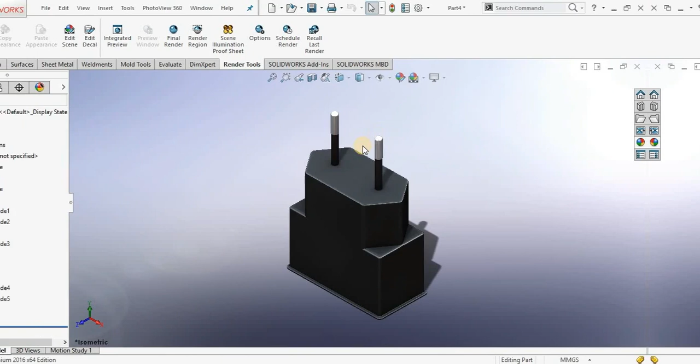Today I'll be showing you how to draw a charger on SolidWorks. The first thing we're gonna do is to open a new part.

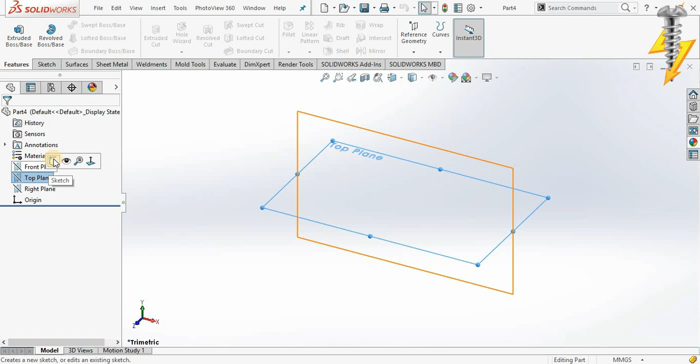We go to the top plane and open a sketch. Draw a rectangle from the center, then we go to smart dimensions.

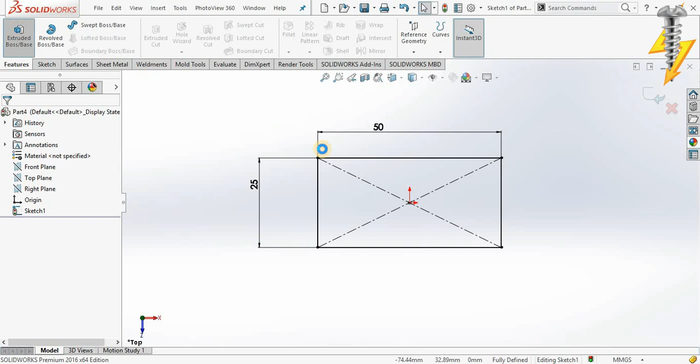We go to features, extruded boss, then we choose 29. Then we open a sketch on this face and set it to normal to.

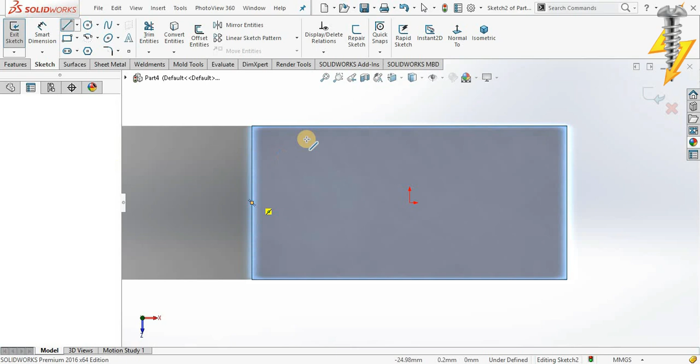Go to smart dimensions and take suitable dimensions, 9mm for each side, that's enough.

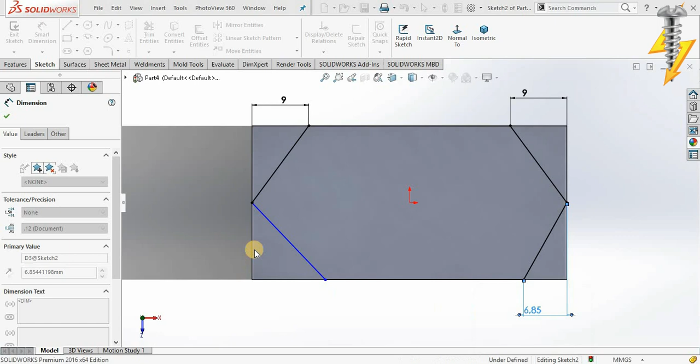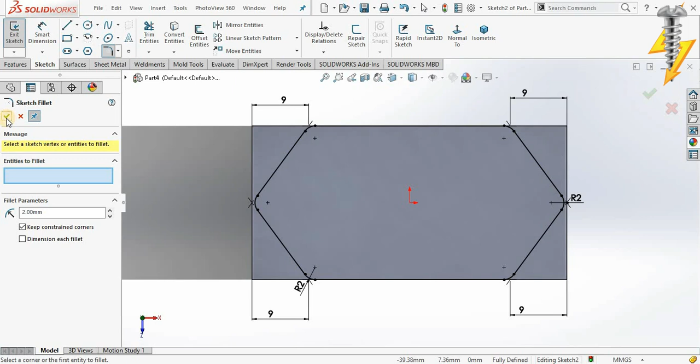Then we go to sketch fillet. We select those 2 points and take 2mm, from here to the other sides. We press OK, then go to features, extruded boss.

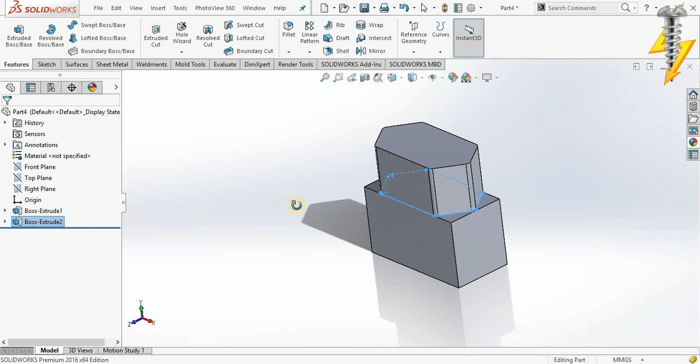Then we can add more fillets to make it look more real. Two is too much, 1mm I guess.

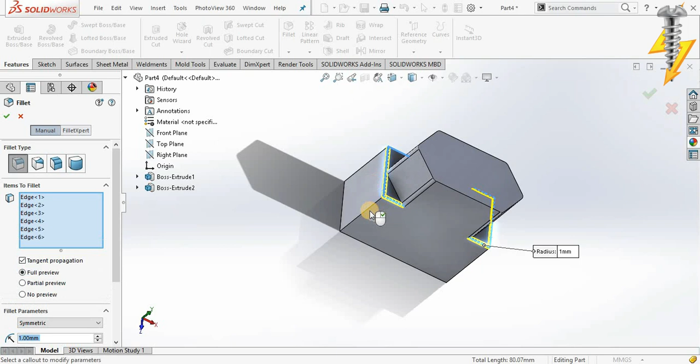Now it looks more real. We can add something to this stand. We open a sketch like you see, then we press offset entities.

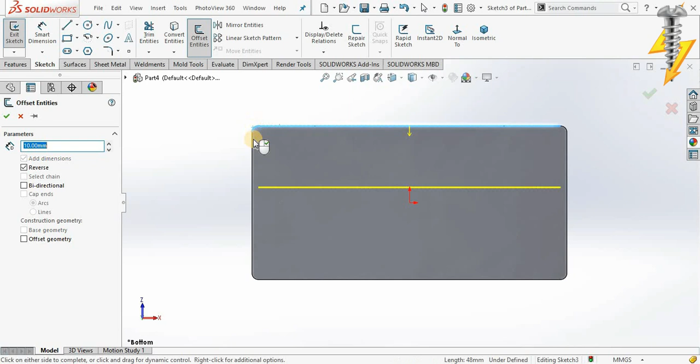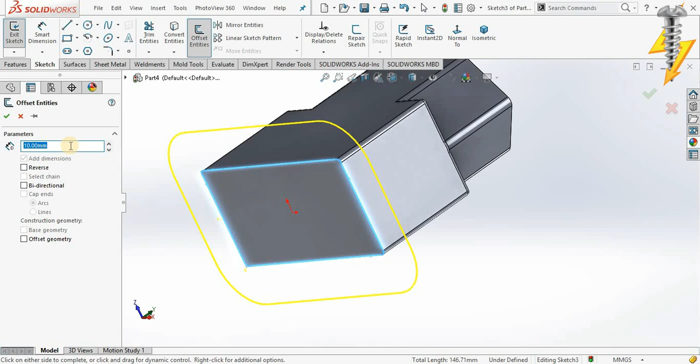We select all entities and set reverse. We select the wrong one here. We press 1mm, that's enough, and extrude boss by 1mm.

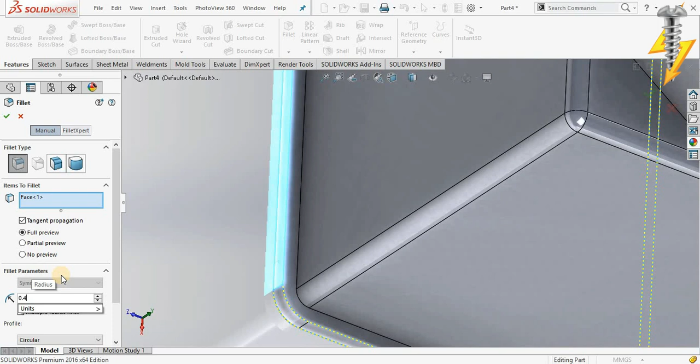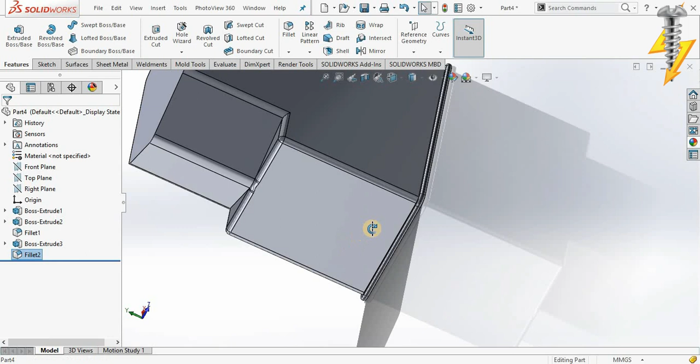Select the whole part, go to fillet. The reason why we keep adding those fillets is because it gives a real view for the product, because in real life those edges don't really exist.

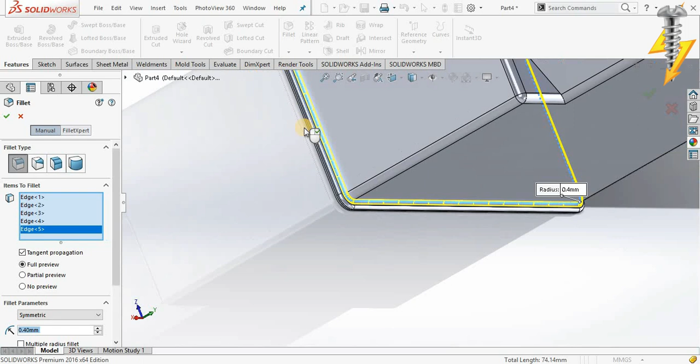We're okay with that now. We press OK, we are done here.

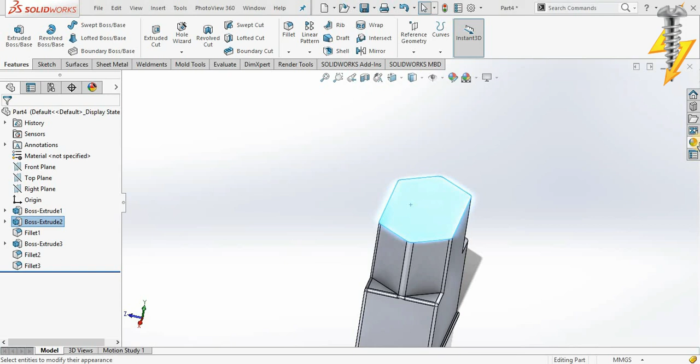Now we can change the color of the product after we complete. Before we complete, I'm sorry. I guess it's black. We press OK now.

Then we choose this sketch, add a fillet on this plane. We are okay with that.

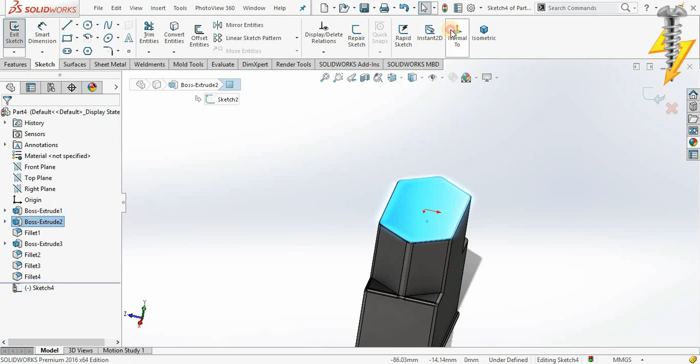Then we add a sketch here, normal to. We draw 2 circles on both sides.

3mm circle will be enough, 12mm for both.

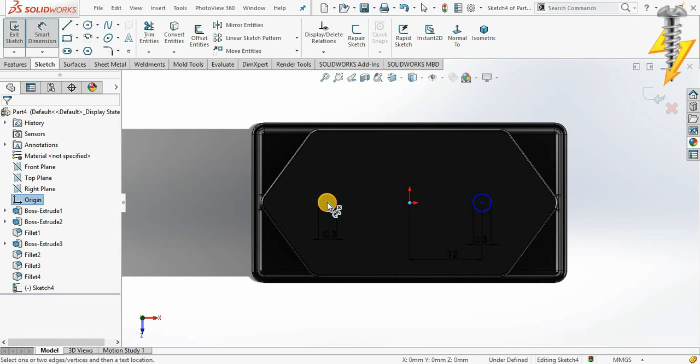And we press OK. We go to features, extruded boss base, and we press OK.

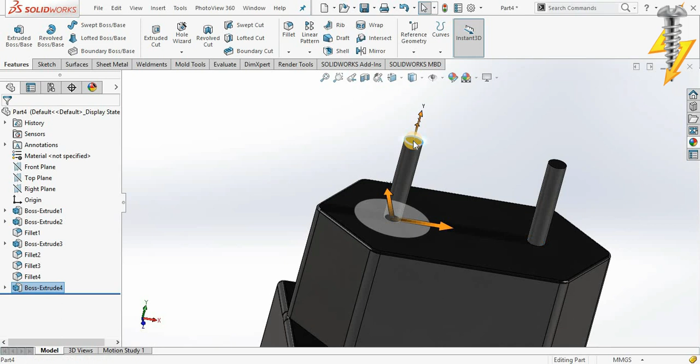Then we almost complete, and for the aluminum parts we open up a new sketch and set offset entities for 0.1, and press OK. We do the same thing for this and press OK.

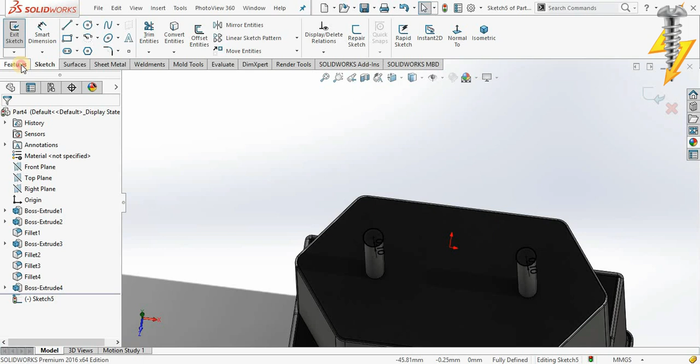We go to features, extruded boss, we choose 10. 10 is okay.

We open fillet, choose 1mm, and press OK.

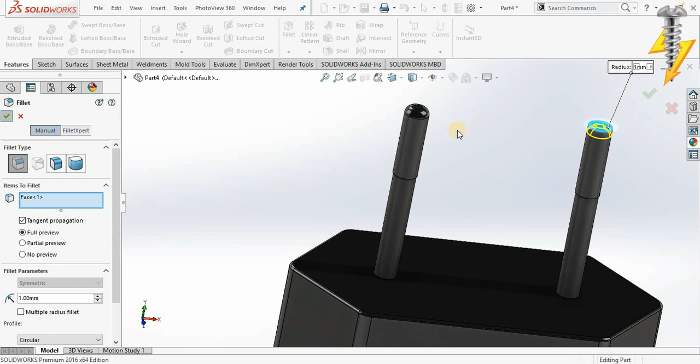Now what we're gonna do is change the color of the function. Go to aluminum, polished aluminum, choose also the surface.

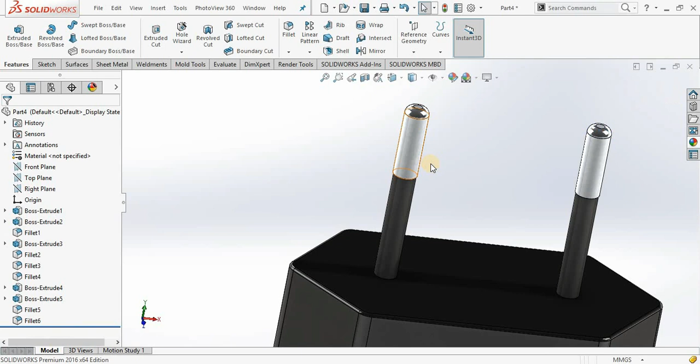We are done here, and to make it more real we should modify the scene. Maybe rooftop will be okay for that, and we change the view direction from here.

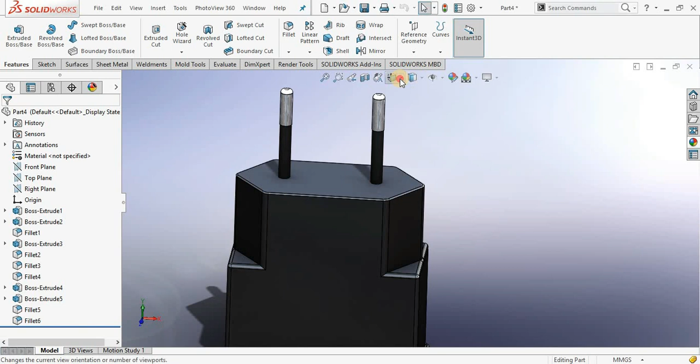That's okay, I guess. And we go to the render tool to make it look more real. We go to add-ins, photo view must be selected, and press OK.

We go to render tools. If render tools doesn't exist, we right click here and choose it. We go to render tools, we press integrated preview.

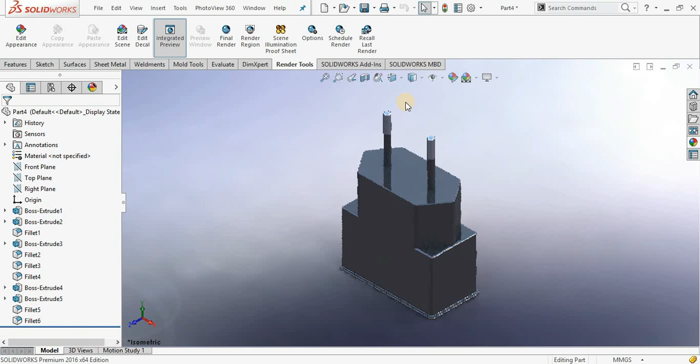It takes time to show the real shape. Much better.